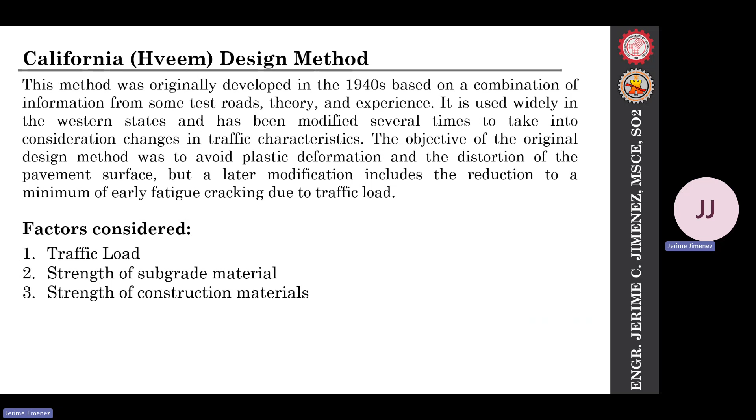Now what are the factors considered in the CDM? First and foremost is the traffic load. Next is the strength of subgrade material and the strength of the construction materials. To begin with, we have the traffic load.

For traffic load, we are still considering in the CDM or California Design Method our ESAL. So what is the formula for ESAL? As a review, ESAL is equal to the design lane factor multiplied by the growth factor, times the annual average daily traffic, times 365 to convert it into years, times the number of axles, times the load equivalency factor.

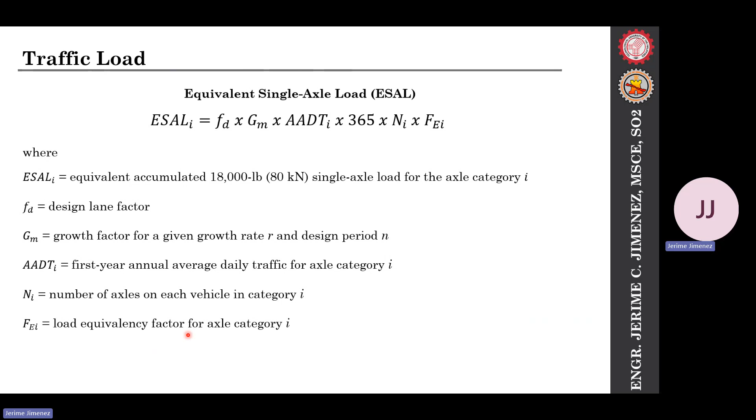So let's go back to the AASHTO design method. As I mentioned, the CDM is just one variation of the AASHTO design method, that's why we are still using SI units. Now here's what's added when it comes to traffic loading in CDM.

We have the traffic index, or TI. The formula for TI is equal to 9 times ESAL divided by 10, raised to 6, raised to 0.119. That will be our traffic index, and we will need that traffic index in computing our design factor, the design factor for our lanes.

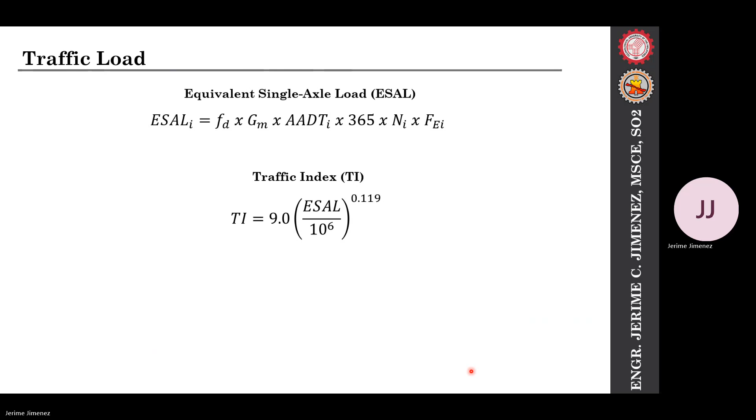Next, we have the strength of subgrade material. We need to get the strength of the subgrade material because this is one of the most used materials in our pavement. This is also what supports against plastic deformation. That's why, since we cannot avoid plastic deformation, we strengthen the subgrade material instead.

And to strengthen our subgrade material, we use this formula: the resistance value, denoted as R. R is equal to 100 minus 100 over 2.5 over D, multiplied by PV over PH minus 1, all plus 1. That R is our resistance value, which we will use later on. Our PV is the vertical pressure at 1,100 kilopascal, the pressure on our subgrade material—take note, vertical pressure on the subgrade material. We also have PH, the horizontal pressure at that same vertical pressure of 1,100 kilopascal. And D is the number of turns of the displacement pump.

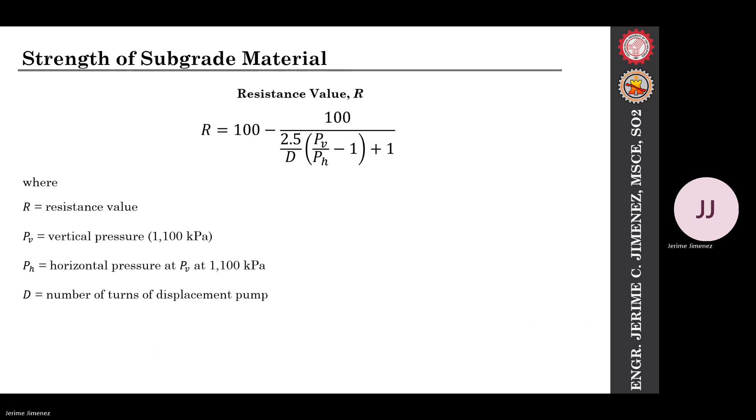That is our resistance value.

Now let's proceed with the strength of construction materials. The strength characteristics of each construction material like asphalt, concrete, base, and sub-base materials are given in terms of the gravel equivalent factor, for which our formula is as follows.

If the thickness of the hot mix asphalt layer is less than 0.5 feet or 150 mm, our formula for the gravel equivalent factor is 5.67 all over the square root of the traffic index.

Whereas when the thickness of our asphalt layer is greater than 0.5 feet or greater than 150 mm, our gravel equivalent factor is equal to 7 times the cube root of the thickness of our hot mix asphalt layer all over the square root of the traffic index.

So this will be our formula for the gravel equivalent factor, or G sub F.

But the CDT, or the California Department of Transportation Design Manual, has already provided the gravel equivalent factors for different types of materials. So it is possible that we don't need to compute further our G sub F, the gravel equivalent factor, since it's given as per the material. We only use these formulas and conditions when the gravel equivalent factors are not available in the table given by CDT.

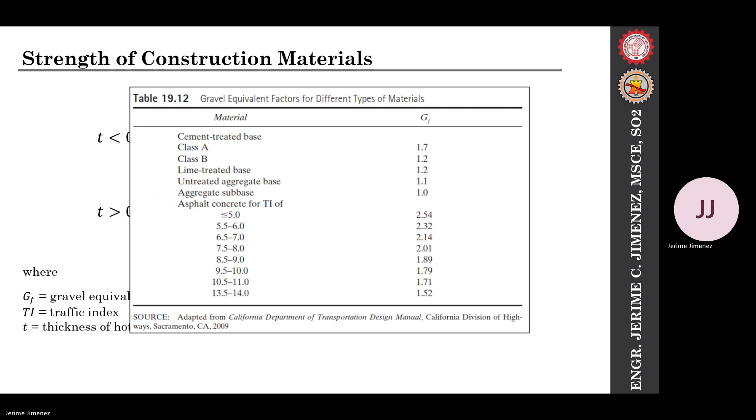Now, for the structural design of our flexible pavement using the California design method, the objective of the design is to determine the total thickness of material required above the subgrade to carry the projected traffic load. Again, why do we do pavement design?

We want to carry and project the load conditions or loadings from our asphalt going to our soil or the subgrade. That's our purpose.

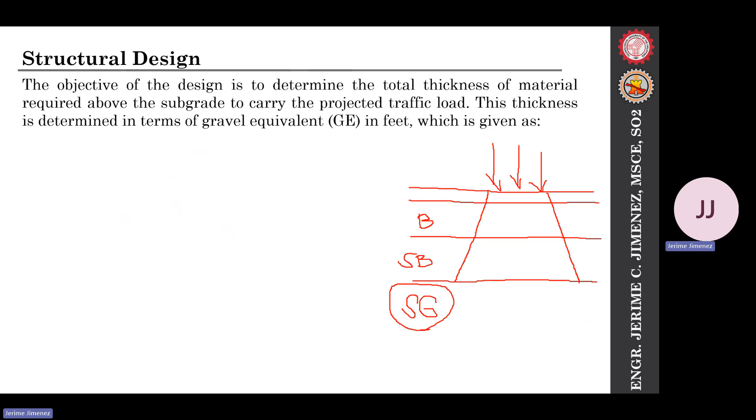So now, this thickness is determined in terms of gravel equivalent in feet. Again, gravel equivalent in feet. Take note, it's in feet that we will compute when we use this formula.

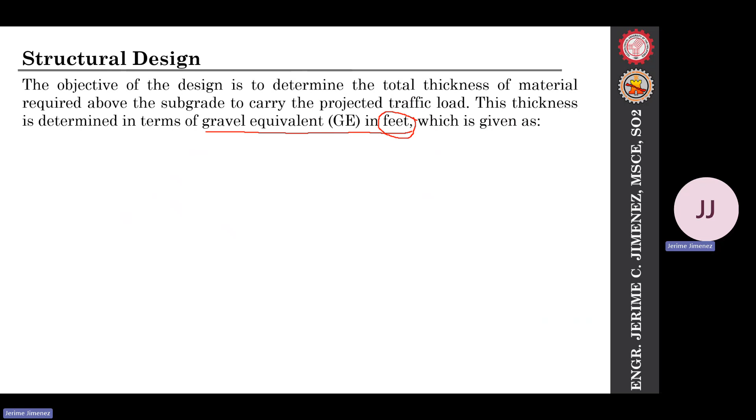Which is given as GE is equal to 0.00096 multiplied by the traffic index multiplied by 100 minus the resistance value.

Wherein our GE is the thickness of material required above a given layer in terms of gravel equivalent, in meters. Okay, so it's not just in feet, it can also be used in meters.

I stand corrected. So our TI, we can compute that, it's unitless, that will be in traffic index. Our R is the resistance value of the supporting layer material. Normally, it is determined at an exudation pressure of 2.07 megapascal.

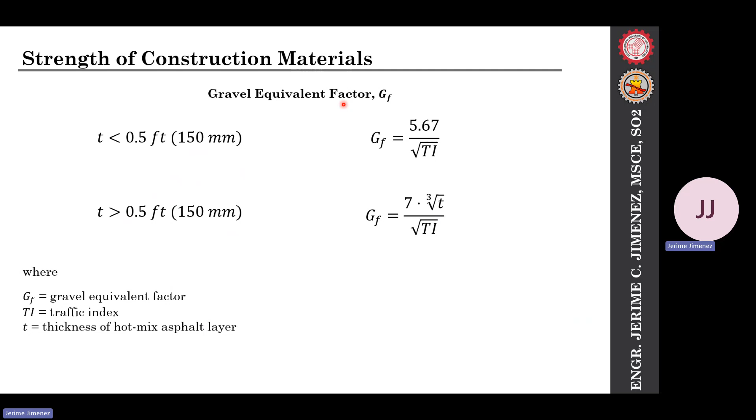The actual depth of each layer can then be determined by dividing the GE, or the gravel equivalent, for that layer by the GF. What is GF? Our GF is the gravel equivalent factor. If we divide the GE by the GF, we will get the actual depth.

So later on, we'll have a problem where we divide gravel equivalent by the gravel equivalent factor.

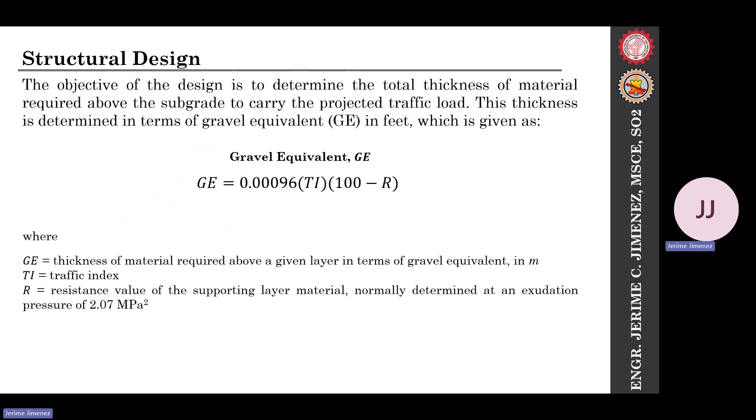So that's all for the California design method. Let's now proceed to example number 2, wherein we are going to design a flexible pavement using the Hveem method or the CDM, the California design method.

A flexible pavement is to be designed to carry 1.5 times 10 raised to 6 ESAL during its design period. Using the California method, determine the appropriate thicknesses for an asphalt concrete surface and a granular base course over a subgrade soil for which stabilometer test data are shown in the table.

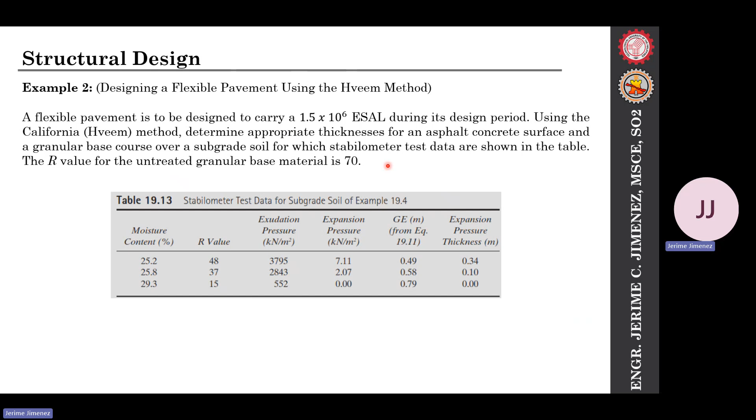The resistance value or the R value for the untreated granular base material is 70. So let's compute for this one.

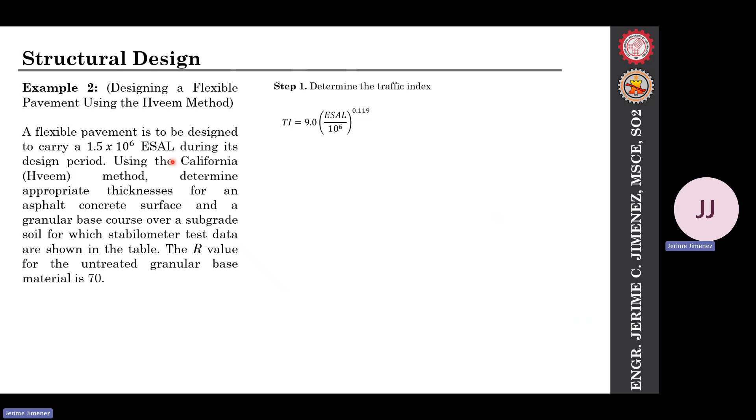First step, we need to determine the traffic index. The formula for traffic index is TI equals 9 times ESAL over 10 raised to 6, raised to 0.119. Since ESAL is given, which is 1.5 times 10 raised to 6, let's plug that in.

We can now have the value for our traffic index as 9.44, or approximately 9.5. I suggest you round it up, make it 9.5.

Next step is to determine the asphalt concrete surface thickness over the granular base. This is GE over GF. So first let's compute the GE, the gravel equivalent.

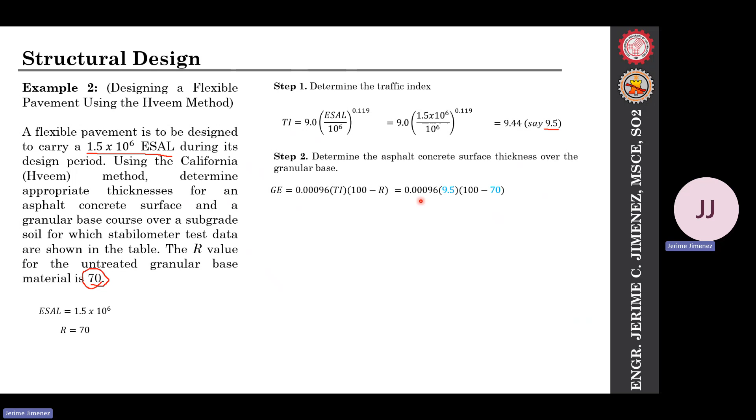The formula for our GE is 0.00096 times the traffic index times 100 minus R. We're given the R value of 70, and we already computed our traffic index. So plugging in, we have 0.00096 times 9.5 times 100 minus 70.

We can now have our gravel equivalent as 0.27 meters.

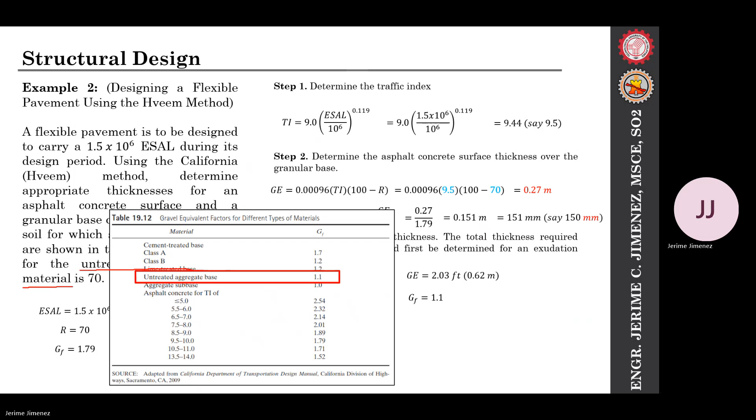Now, to compute for the design or the actual base thickness, we can just divide GE by GF. I'll use the value in terms of meters, so that will be 0.62 over GF, which is 1.1. Therefore, we can now have our base thickness as 0.56 meters. So we can now design the base course as 0.5 meters.

And that will be the three-step design method of the California design method.

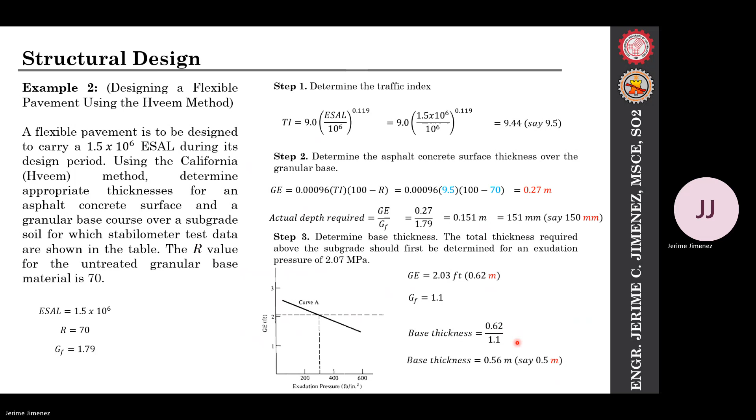Now let's proceed with some additional problems when it comes to flexible pavement. Our next problem is more on design life and the number of lanes. Earlier we were asked about the traffic index, the gravel equivalents, the thickness of the base, and the thickness of the asphalt. Now, when is our flexible pavement useful, and how many lanes can it handle if we add more lanes?

So now for our example number 3, this design is the flexible pavement design life and number of lanes. The initial design of the northbound direction on a highway consists of a two-lane flexible pavement. Take note, it's only two-lane - meaning we only have a northbound and a southbound.

It has an SN, which is the structural number, of 5, and is designed for a subgrade CBR, the California bearing ratio, of 6. This CBR will be discussed further in your soil mechanics, but it's given to us here in highway engineering.

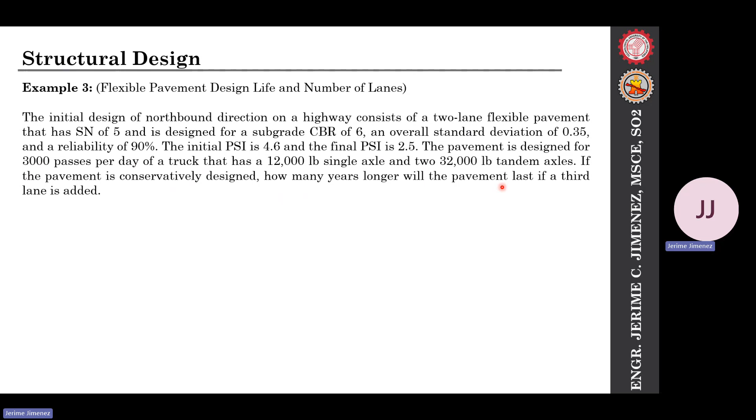How many years longer will the pavement last if a third lane is added? That's the question. We're not being asked how many years the pavement will last at 3,000 passes per day with just 2 lanes. The question is how long will our pavement last if we add a third lane?

So what we'll use here is the AASHTO design method. We know what M sub R is - let's recall. M sub R is the resilient modulus given to us by AASHTO, the 1993 AASHTO.

The CBR given to us in the problem is 6, so CBR equals 6. Therefore, since CBR equals 6, it falls under our condition - the condition wherein fine-grained soils have a soaked CBR of 10 or less. So we're going to use this formula for our resilient modulus, which is 220 multiplied by the CBR.

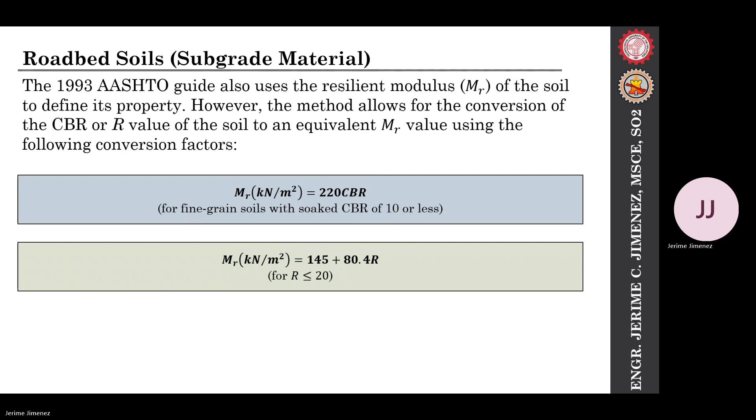Since CBR is given, when we compute 220 times CBR, what we get is in terms of kilonewton per square meter. But the given values in the problem are in English units.

So in terms of pounds, we can have another formula, a converted formula for our resilient modulus. That will be 1,500 times CBR. This 1,500 times CBR will be equal to the resilient modulus, which will have a unit of pounds per square inch, or PSI.

Let's use this one since the given values are in terms of pounds. So given that the CBR is 6, let's plug it in. That will be 1,500 multiplied by 6. Our resilient modulus will be equal to 9,000 PSI.

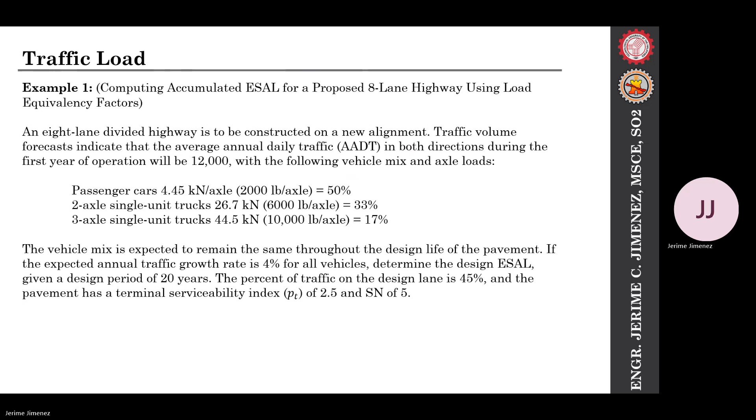So now we can have the change in PSI. That will be the initial PSI minus the final PSI, or delta PSI. This will be our change in serviceability index. So we can have 4.6, which is our initial PSI, minus 2.5, which is our final PSI. Therefore, our delta PSI is 2.1.

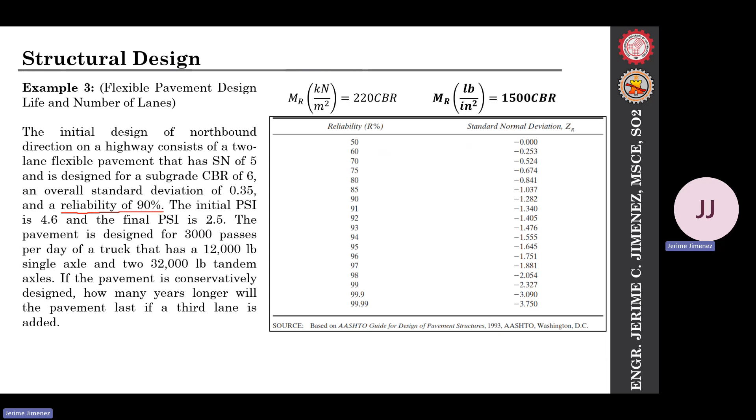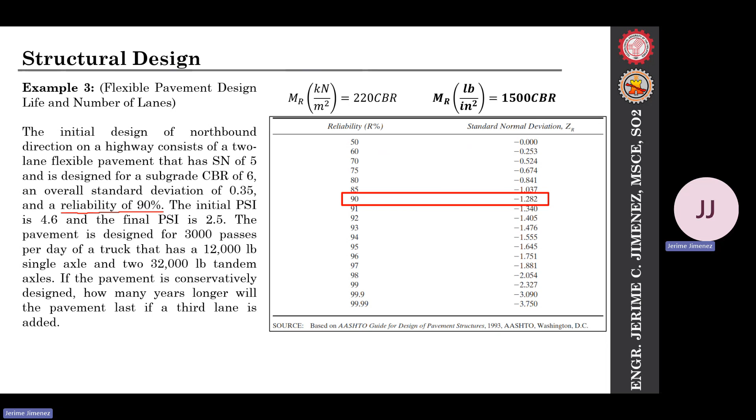2.1. Now, based on the problem, our reliability is 90%. That's our reliability factor, 90%. So what will be our standard normal deviation, which is Z sub R? We need this Z sub R. So a reliability of 90% will have a Z sub R, or standard normal deviation, of negative 1.282.

Next step, here comes our long formula. The logarithm of W18, which is our load - and that's what we're really concerned about, the load itself. So the rest, our Z sub R, that's here. Our S0, the overall standard deviation, is given as 0.35. The structural number is given as well. And the delta PSI is given, which we already computed. And the resilient modulus we already computed too. We can now plug in all the values into our formula.

So if we plug in our Z sub R, or the standard normal deviation, that will be negative 1.282, multiplied by the overall standard deviation, which is 0.35, plus 9.36 times the logarithm of the structural number, which is 5, plus 1, minus 0.20, plus the logarithm of our delta PSI, which is 2.1, all over 2.7, all over 0.40, plus the quantity 1094 over the structural number plus 1 raised to 5.19, plus 2.32 times the logarithm of the resilient modulus. Our resilient modulus is 9,000, minus 8.07.

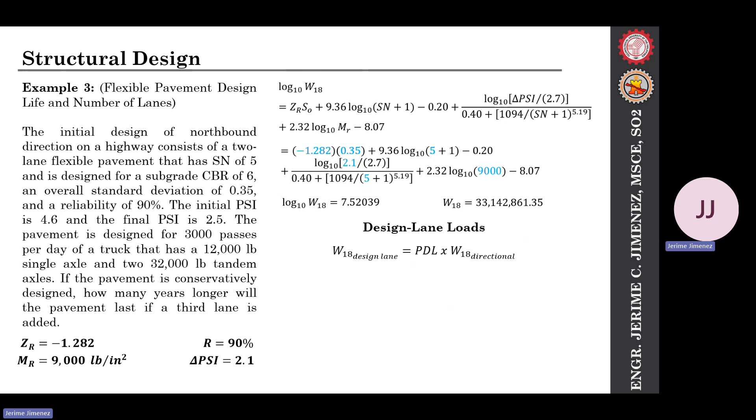So what is the formula for our design lane loads? The design lane loads, W18 of the design lane, is equal to the PDL times the W18 directional. So what is our PDL? PDL is the proportional design lane.

But for these problems, we'll use somewhat the maximum value. So for 3 lanes, I'll use 0.8 later. Initially, the problem says the initial design of the northbound direction is a two-lane flexible pavement. So since it's two lanes, let's put our PDL as equal to 1.0. Whereas, if we add a third lane, making it 3 lanes, our PDL becomes 0.8.